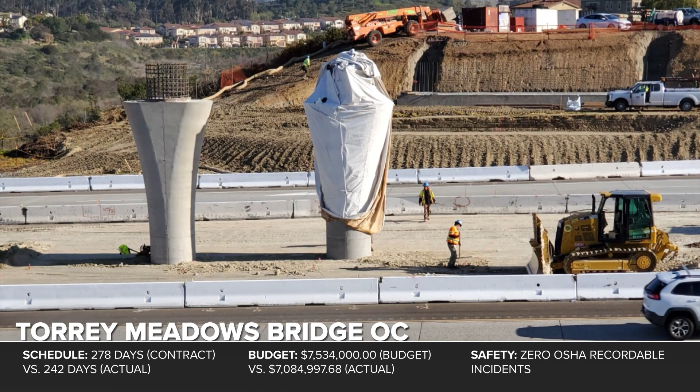The medal winners are: the Torrey Meadows Bridge OC project, led by Caltrans District 11 resident engineer Gennaro Janelle, Flatiron project manager Lenny Gardino, and Global Leadership Alliance facilitator Vicky Mattia Martin. When a new 2-lane bridge was to be built along State Route 56, Flatiron and Caltrans rose to the challenge of communicating and coordinating with the City of San Diego. The project team not only needed to meet Caltrans' design specifications, but had to conform to San Diego's White Book and Green Book specifications for public works projects.

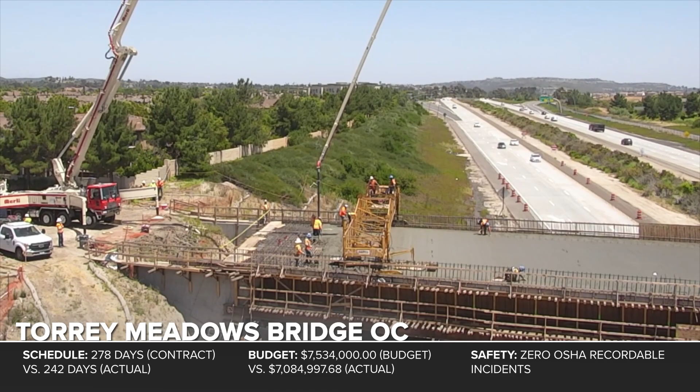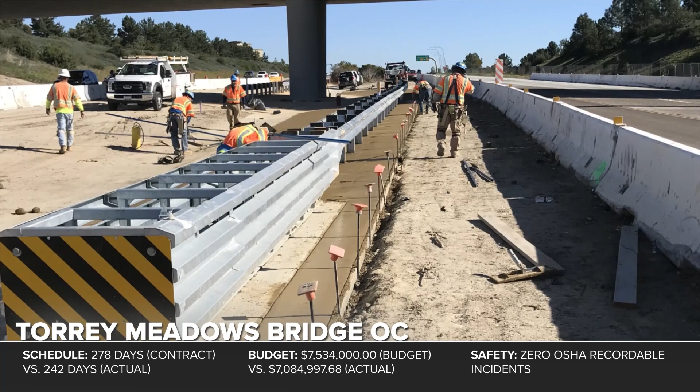The entire team took COVID-19 safety seriously. Everyone agreed to use face coverings before they were state mandated and practice social distancing on site, even during the bridge deck and hot mix asphalt pouring. Because the pandemic had dramatically decreased the number of vehicles on the road, the project team capitalized on the opportunity to increase the lane closure windows. Their decision accelerated construction, and they completed the bridge more than 1 month ahead of schedule.

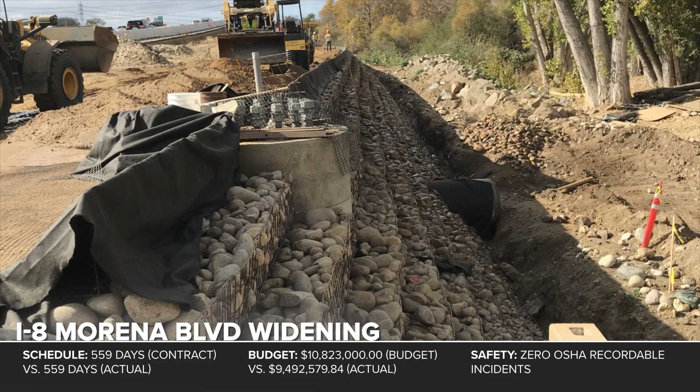The I-8 Morena Boulevard widening project was led by Caltrans District 11 resident engineer Brandon Farmer, Hazard Construction Company project manager Kirk Karras, and Advanced Management Systems International facilitator Bob Dorn. Exceptional teamwork was the order of the day throughout all phases of this widening of Interstate 8. The work of adding a lane and 2 through lanes to northbound Interstate 5 involved a geosynthetic reinforced earth wall, multiple cast-in drilled hole piles and overhead sign structures, a concrete barrier, hot mix asphalt, and precast concrete paving.

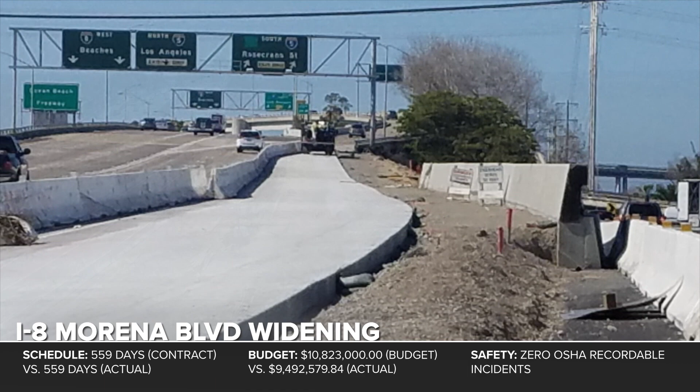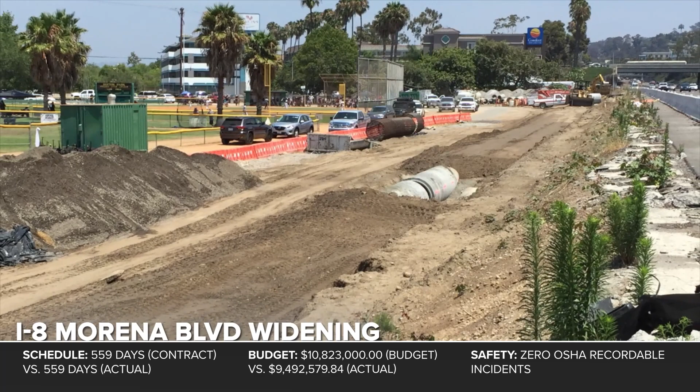Because of environmental constraints for the riverbed, Hazard needed to coordinate with the California Department of Fish and Wildlife, the City of San Diego, the Presidio Little League, various Caltrans teams, and several subcontractors. When the team discovered lead-contaminated soil and silting caused by an open channel, their partnering practices and collaboration paid off. Hazard's value engineering change proposal to replace the channel with a concrete pipe saved Caltrans more than $85,000 and reduced the hazardous soil generation by 30%.

Weekly partnering meetings made problem-solving much easier, even when responsibility for a construction detail was in dispute. Hazard and its supplier, with expertise from Caltrans, kept the project moving forward, ending it on time and under budget.

Congratulations to the teams and the projects under $10 million category for your bronze and silver awards. You truly have shown that partnering, even on smaller projects, pays off.

Next, we have the category for projects between $10 million and $50 million. Let's see who the winning project teams are. The medal winners are the SIDEHILL Viaduct Bridge Replacement and Dog Creek Bridge Retrofit Project, led by Caltrans District 2 resident engineer Nathan W. Alexander, Golden State Bridge Project Manager Paul Lukasiewicz, and OrgMetrics Facilitator Rob Ray.

The SIDEHILL Viaduct Bridge handles traffic heading south on Interstate 5 towards Lake Shasta and is located in the middle of the Union Pacific Railroad right-of-way and over a tunnel, while the Dog Creek Bridge site is in steep terrain that had to be accessed by abandoned roads.

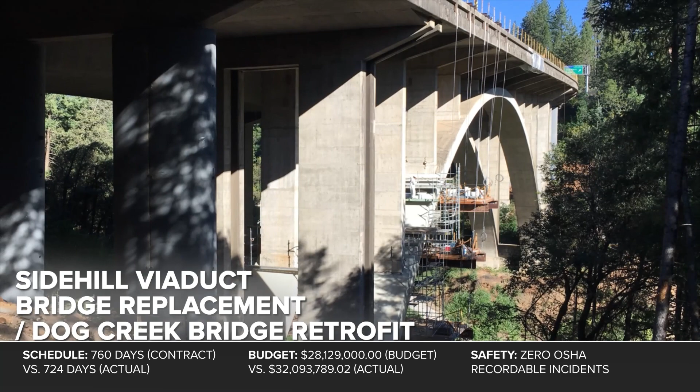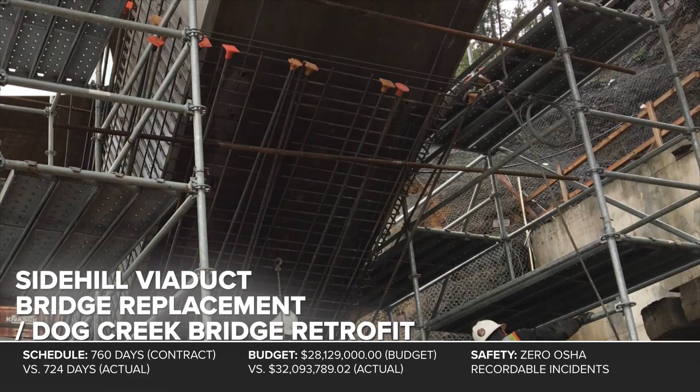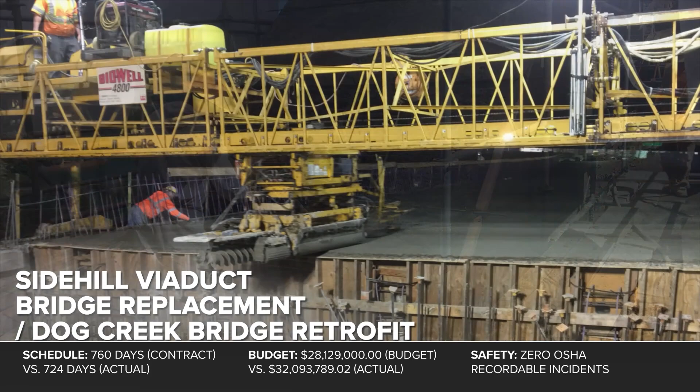But these issues were minor compared to the discovery of the arch's lateral deflection once the temporary falsework was removed. The team halted all work so Caltrans could evaluate the situation and come up with a retrofit strategy. Caltrans design changes included reinforcing the support members with carbon fiber and developing a lightweight concrete for the bridge superstructure. Golden State Bridge and Caltrans successfully coordinated the unplanned work with the Union Pacific Railroad, the U.S. Forest Service, and various regulatory agencies so that the rest of the planned work could proceed.

The SMARTSVILLE Roadway Realignment Project was led by Caltrans District 3 resident engineer Aaron Chamberlain, Flatiron Project Manager Charles Morrow, and Pinnacle Leadership Group Facilitator Kelly Bonine Hall.

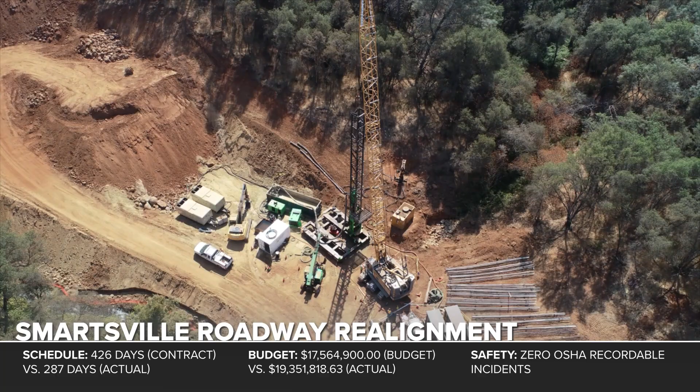Completing this super elevated bridge project in Yuba County's Gold Country, which updated geometric design to current standards, required 2.1 miles of new roadway to be constructed on a segment of State Route 20 with large cuts, fills, and a 305-foot structure. The project site was filled with hard rock, so the terrain was not ideal, and the project team needed to use controlled blasting to assist in the excavation of 130,000 cubic yards.

The bridge design called for precast girders approximately 150 feet long and required extreme engineering and ingenuity to construct. Through effective communication, Caltrans and Flatiron made it possible to complete construction with no incidents or delays.

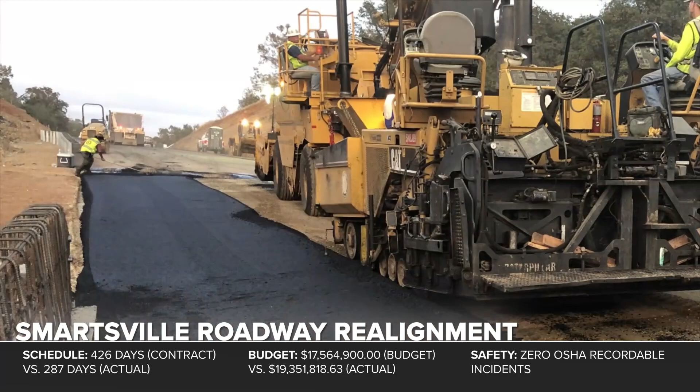Early on, Caltrans discovered a large earthwork error, and with the collaborative effort of the North Region Design Team, North Region Construction staff, and Flatiron staff, a 397-page change order was created and implemented that modified major portions of the roadway and addressed this issue. Flatiron adjusted its construction sequencing to accommodate these changes, and their effort minimized impacts to the project schedule and cost.

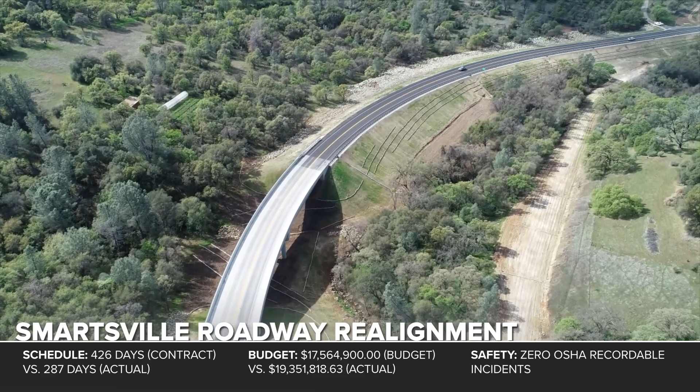The Highway 70 Widening Segment 1 project was led by Caltrans District 3 resident engineer Ryan Johnson, Teichert Construction Project Manager Danny Warren, and Global Leadership Alliance Facilitator Dina Blake.

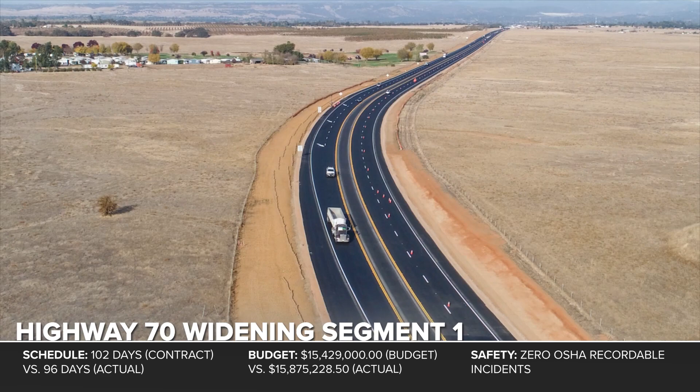This project was the first of 5 in a plan to widen Highway 70 from Oroville to Marysville for safety improvements. Highway 70 lacked a passing lane, and District 3 was determined to address the higher-than-average accident rates and improve safety before the end of the 2019 construction season. The project team fully committed to these goals.

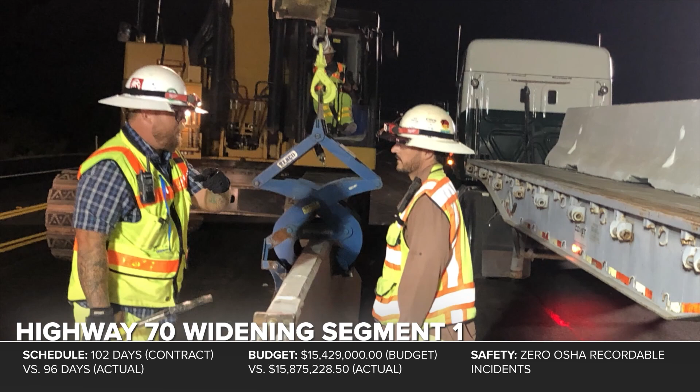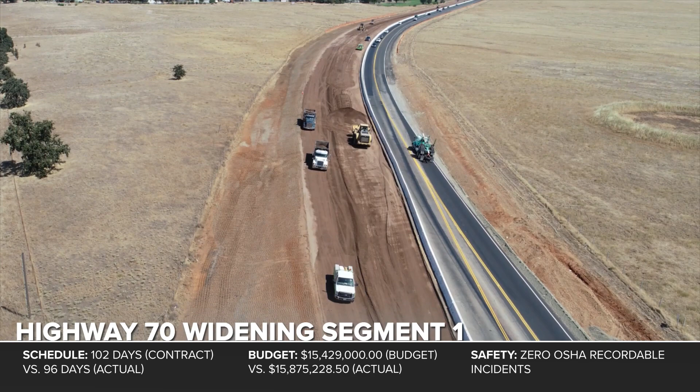Caltrans and Teichert Construction needed to complete 100,000 cubic yards of roadway excavation and import borrow in just 20 working days, a feat that required large amounts of compaction testing. So the Teichert Construction personnel and the Caltrans testing staff collaborated to ensure both quality control and quality assurance testing were performed efficiently and safely.

The Interstate 680 ramp metering project was led by Caltrans District 4 resident engineer Hung No, Bay Cities Paving and Grading Incorporated project manager Dave Knott, and ATI Systems facilitator Craig Erickson.

On this project in Alameda County, the Caltrans and Bay Cities Paving and Grading team installed metering at 4 on-ramps, added a high-occupancy vehicle lane to northbound I-680, constructed 2 retaining walls, and installed 6 closed-circuit TV cameras, 2 changeable message signs, 18 traffic monitoring stations, and 6 maintenance vehicle pullouts.

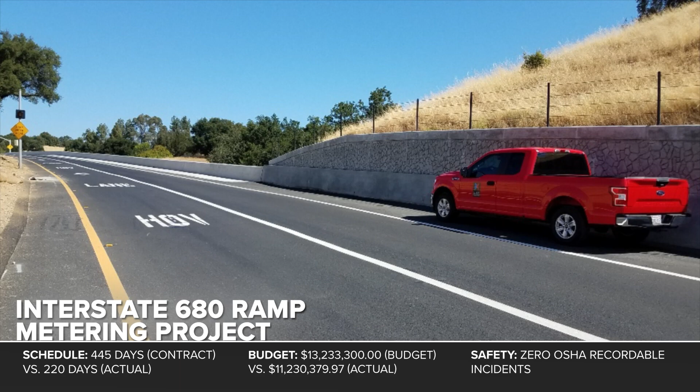When electrical work for the ramp metering was found to overlap with other Caltrans projects on the corridor, Bay Cities initiated constant contact with the other projects in the area for the team to coordinate and sequence the project's electrical components, thereby avoiding costly delays and throwaway work.

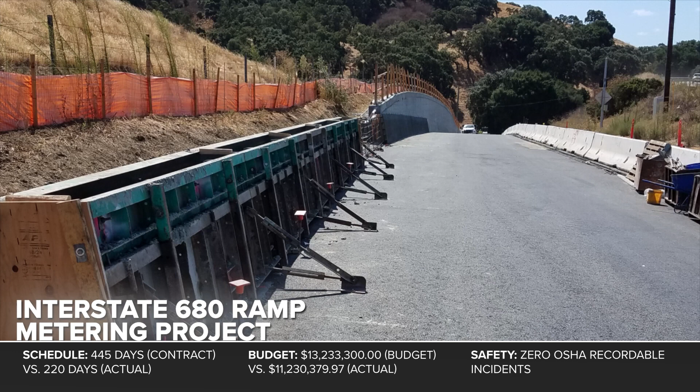And when conflicts were found with the new concrete median barrier and existing underground drainage and electrical systems, the entire project team scheduled field meetings to collaborate on designing a concrete barrier that both resolved the conflicts and avoided the project's temporary lighting. In the end, the team not only completed the project well ahead of schedule, but shaved more than $2 million off the total cost.

The I-880 and SR-84 ramp improvements project was led by Caltrans District 4 resident engineer Vernon Nguyen, Ghilotti Construction Company project manager Gia Chen, and Global Leadership Alliance facilitator Holly Parrish-Besner.

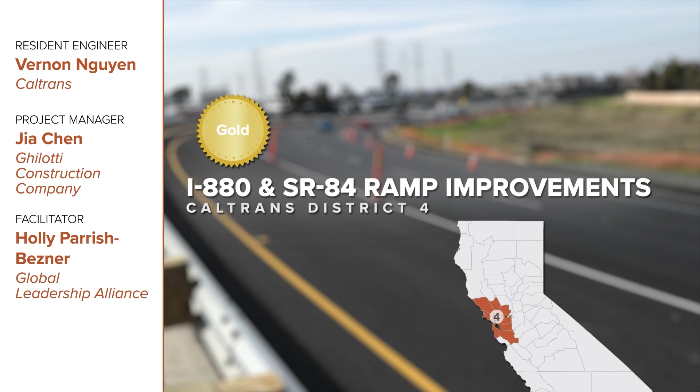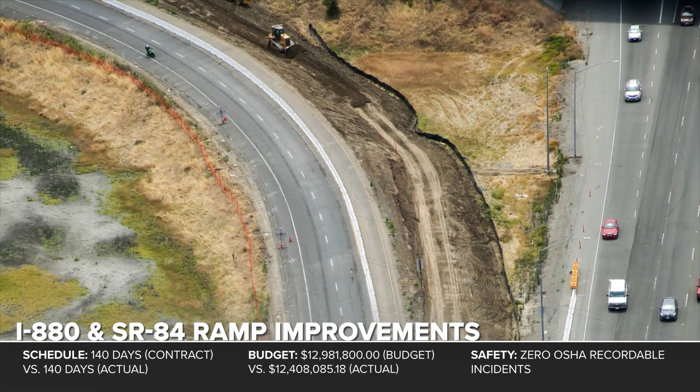This project near Fremont and Newark in Alameda County required a Herculean effort. At the very start, the project team faced a situation that could have negatively impacted the cost and schedule. There were fiber optic and other underground utilities owned by the Bay Area Infrastructure Financing Authority that were not shown in the contract plans at bid time.

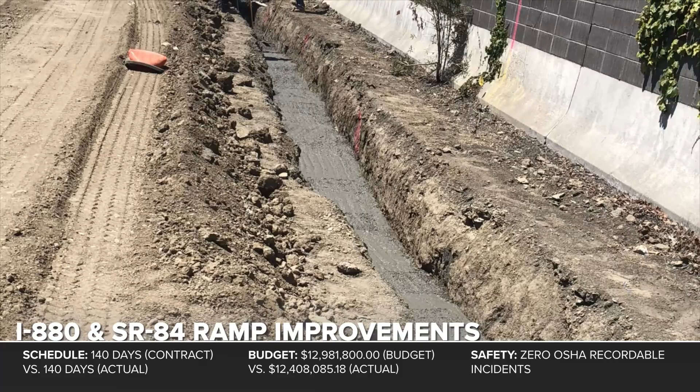The project team held a number of meetings with all of the local stakeholders and ultimately reached an agreement on a plan to expose and cap the fiber optic lines. Caltrans expedited the design as well as buy-off from the financing authority, while GCC worked on gathering the materials and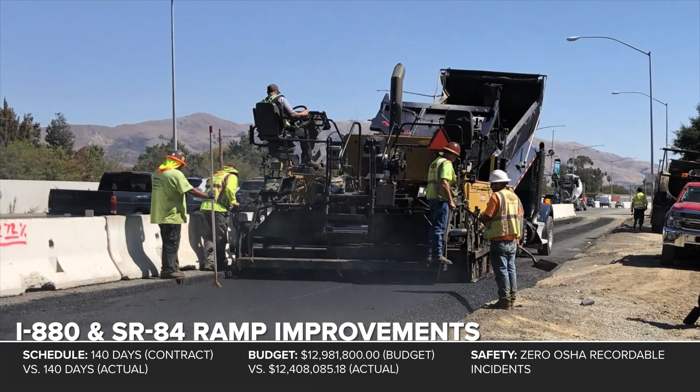resources to execute the work quickly. This same issue put the hot mix asphalt paving schedule at risk, so the team brainstormed ways to get the paving done before the winter season. Caltrans coordinated with the district office to change ramp closures for daytime and weekends, while GCC arranged for its paving

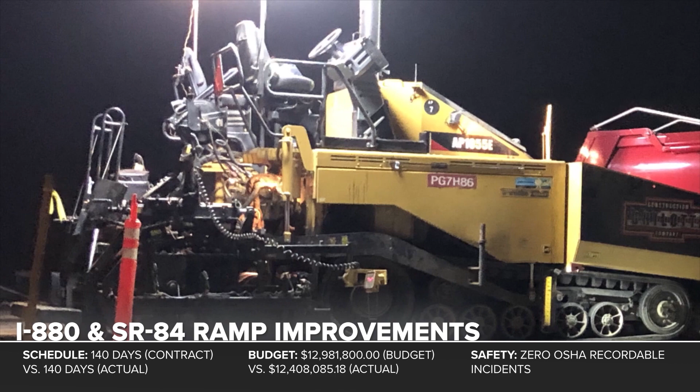crews to work overtime and weekends. Strong partnering brought the project in under budget, and the team achieved one of its main goals: 0 claims.

The Route 198 Pavement Rehabilitation Project was led by Caltrans District 6 resident engineer Javier Huerta, Lee's Paving Incorporated project manager Russell Carell, and ATI Systems facilitators Craig and Dennis Erickson.

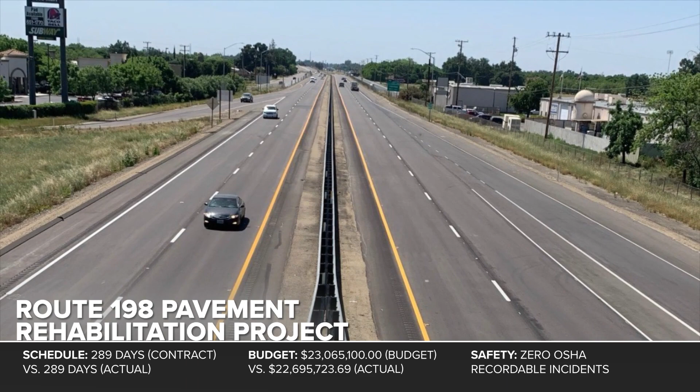When a supply issue cropped up with the pavement overlay on an 8-mile stretch of Highway 198 in Tulare County, the team decided to replace the rubberized hot mix asphalt pavement overlay with Type A HMA. And to improve efficiency and reduce the number of days with lane closures, they piloted varying closure lengths outside of the peak traffic periods. Their efforts succeeded, as the project was not only completed on time but under budget.

And to comply with the COVID-19 shelter-in-place order, the team became one of the first Caltrans project teams to use WebEx for a virtual closeout partnering session.

Partnering was especially critical for this pavement project because Lee McClatchy, president of Lee's Paving, who was also the team's project manager, suffered health issues and tragically passed away during the course of the project. But Lee's commitment to partnering was evident.

When Russell Carell became the company's president as well as the project's PM, the team recommitted themselves to the partnering principles Lee established in the initial partnering charter. The team smoothly transitioned with a new plan of attack to complete the project in Lee's honor.

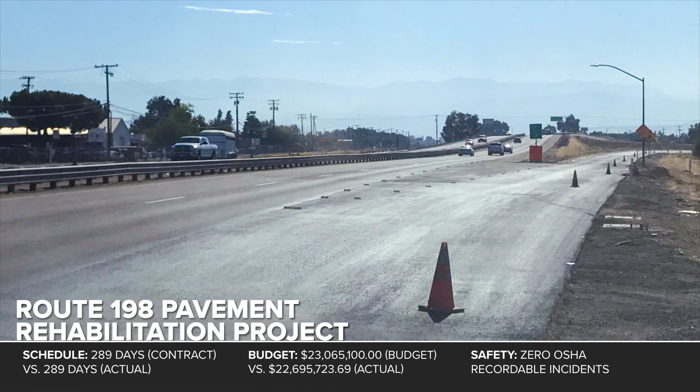The State Route 190 LAIRDS Rehab project was led by Caltrans District 6 resident engineer Javier Huerta, YARB's Grading and Paving Incorporated project manager Troy Yarborough, and Creative Alliance Group facilitator Leonard Steinberg.

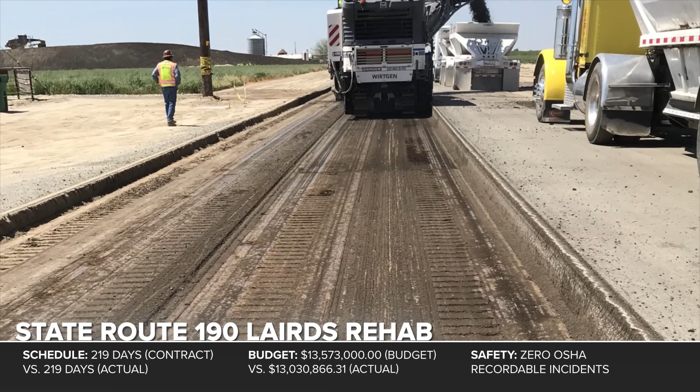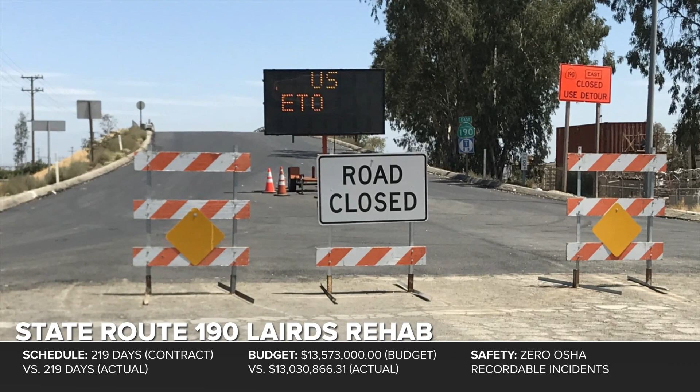This pavement reconstruction and widening project along State Route 190 would not have succeeded if the team had not fully engaged with the County of Tulare and the public. Among the early obstacles were the public utilities lining the Caltrans right-of-way and conflicts with another Tulare County project. To avoid delays from these two obstacles, the team coordinated with all stakeholders to modify the project staging.

They developed a change order that allowed YARB's Grading and Paving to work on the eastern 4 miles of the project under a full closure, with a detour using Tulare County roads, while Tulare County simultaneously reconstructed part of its roadway under a full closure, using the western portion of State Route 190 as a detour.

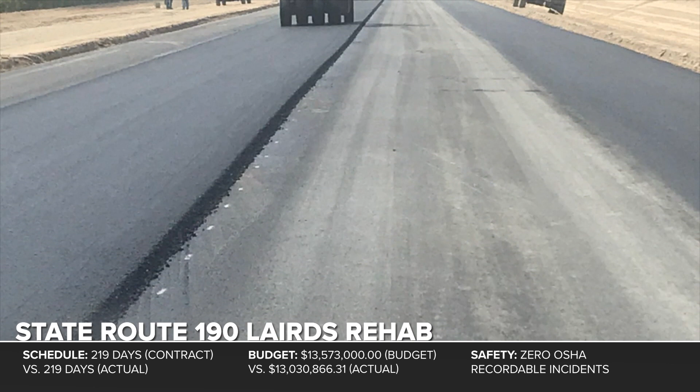The State Route 52 slabs replacement project was led by Caltrans District 11 resident engineer Gennaro Janelle, Hazard Construction Company project manager Kirk Karras, and GreenCom Incorporated facilitator Dennis Green.

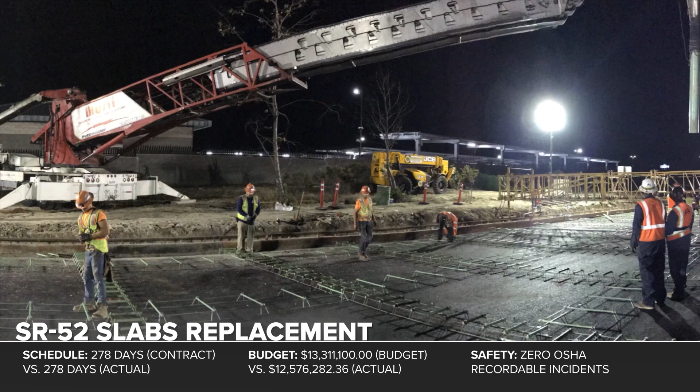In the kickoff workshop for this slab replacement project on State Route 52 just south of Miramar Air Base, Caltrans and Hazard Construction agreed on a change order to reduce the 10 night shift closures down to 2 55-hour weekend closures. The reduced number of closures significantly lessened the project's impact on the public and the exposure of workers to

traffic risks. The project team's partnering process to address incidents with impaired or distracted drivers was an essential part of the team's safety strategy to achieve 0 job site injuries.

Hazard and Caltrans held a joint safety stand-down to identify and reduce the risks to motorists in the project area. The team developed new lane closure charts and brainstormed ideas to improve the safety environment for everyone, workers and motorists. At the end of the day, they were able to complete the project safely, on time, and under budget.

The State Route 52 Restore Pavement Profile project was led by Caltrans District 11 resident engineer Carlos Lopez and S&B Engineering Incorporated project manager Josh Bridwell.

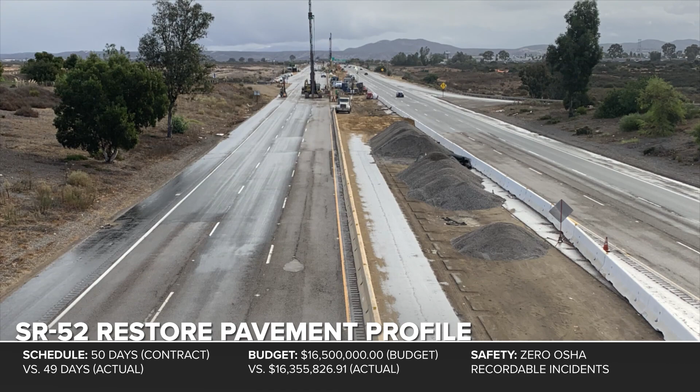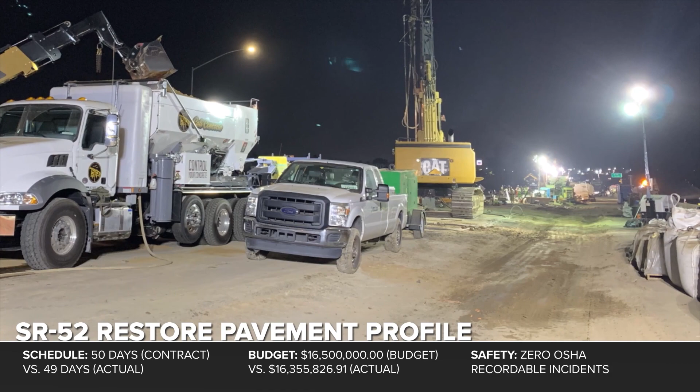When State Route 52 was built, constructing a highway over a landfill was a unique idea, but in this case, one with an unexpected outcome. Due to settlement in some areas, the highway, which runs between the San Diego suburb cities of Santee and La Jolla, was dubbed the roller coaster route. Motorists noted that it was bumpy, unsafe, and damaging to vehicles.

Tasked with stabilizing the subsurface to mitigate the roller coaster effect, S&B Engineering applied 3D modeling for the grinding and AC paving phases to correct the profile and achieve the necessary smoothness.

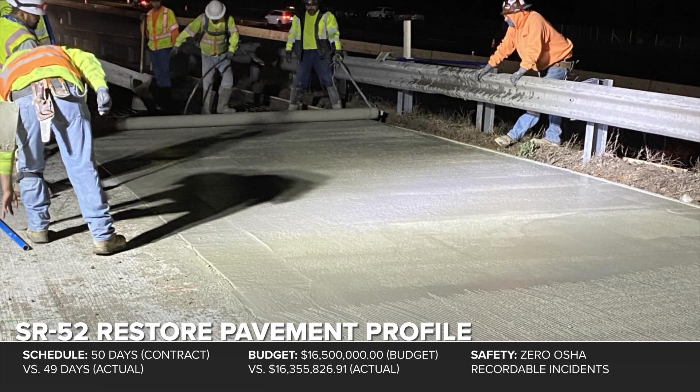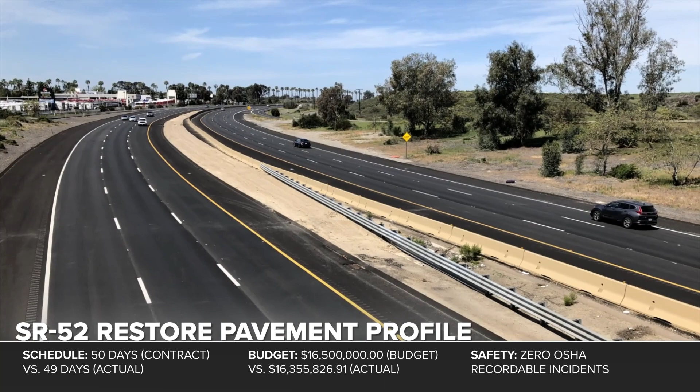Congratulations to the teams in the $10 to $50 million category on your gold, silver, and bronze partnering awards. Now let's find out who the best-in-class award winner is for this category.

And the winner is the Interstate 880 and State Route 84 Ramp Improvement Project. Congratulations. And here with a special message for the team is the District 4 Director, Dina El-Tawansi.

Hello, I'm Dina El-Tawansi, Caltrans Director in the Bay Area. I would like to congratulate the team that worked on the I-880 and State Route 84 ramp improvements in Fremont and Newark.

Complex projects like these improvements require a real focus and collaboration between everyone that's involved to be successful. An unparalleled effort of communication and collaboration is being celebrated today that led to our success at handling challenges that could have caused great schedule and cost impacts to the project.

Special thanks are in order for the Caltrans team, the Jolari construction team, staff at the Global Leadership Alliance, and the San Francisco Public Utility Commission and the Bay Area Infrastructure Authority for the close coordination and attention to the details that it took to make this transportation improvement a reality.

On this $62 million reconstruction of 21 lane miles of southbound Interstate 5 near Mount Shasta, all the work took place on a section of interstate highway subject to harsh winter conditions and heavy truck traffic.

So how did the project team manage to shorten the schedule to complete this project in 2 seasons instead of 3, and save more than $3 million?

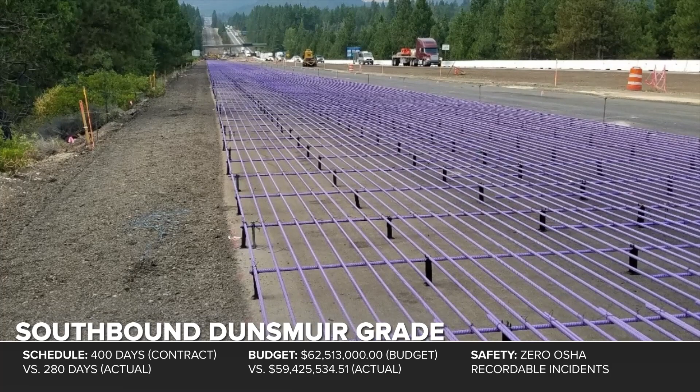J.F. Shea Construction and Caltrans collaborated on a value engineering change proposal that would make stage construction changes to allow the team to finish the project well ahead of schedule.

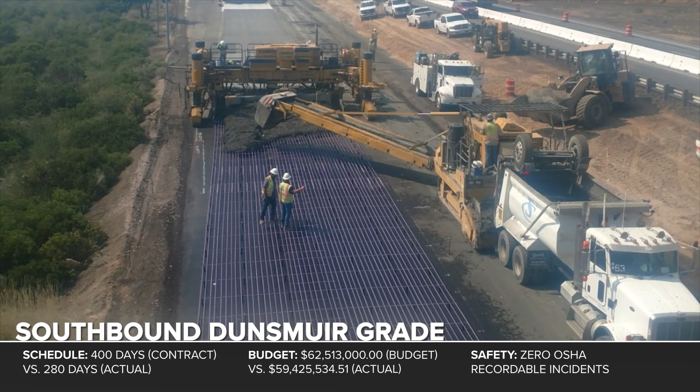In the process of developing these restaging plans, the team identified ramps would need to be temporarily constructed for trucks to access the nearby California Highway Patrol inspection facility.

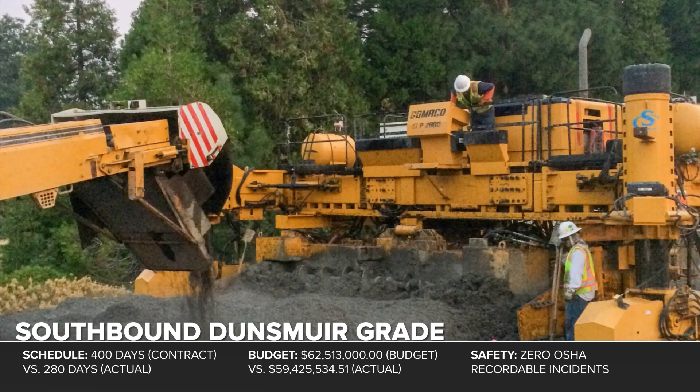While partnering through these logistics, it was determined that since another project was being constructed within the Scales facility, the CHP was willing to accept a long-term closure of the Scales to allow work on Interstate 5 to proceed without the need for temporary ramps.

Working long hours and multiple shifts, the team managed to complete half the work in under 6 months.

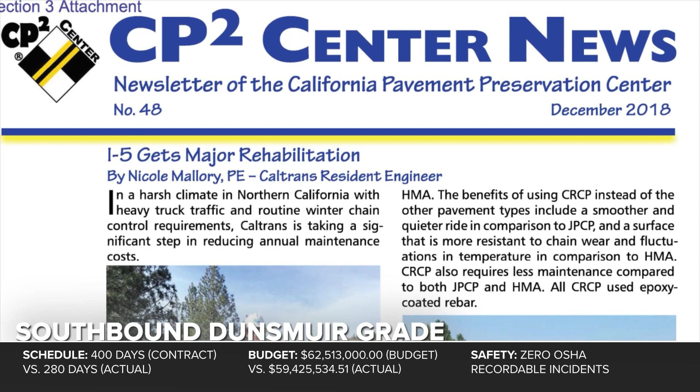Local newspapers covered the partnering between Caltrans, J.F. Shea, and the California Highway Patrol numerous times, and the project itself was recognized by the California Pavement Preservation Center at Cal State Chico for its long-life pavement design.

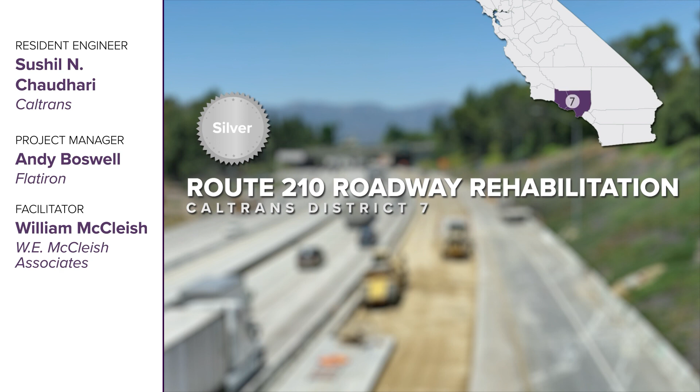The Route 210 Roadway Rehabilitation Project was led by Caltrans District 7 resident engineer Sushil N. Chaudhari, Flatiron Project Manager Andy Boswell, and W.E. McCleish Associates Facilitator William McCleish.

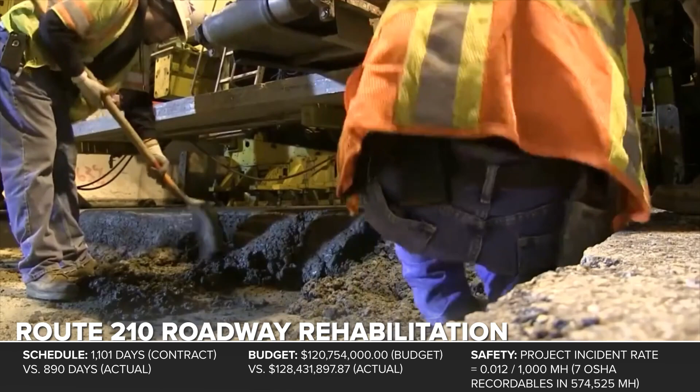On this $128 million project through La Cañada Flintridge, Glendale, and Pasadena, the project team replaced nearly 400,000 square yards of pavement and bridge approach slabs at 16 locations along 10 miles of the 210 freeway. Flatiron used 11 types of pavement, some experimental, including precast jointed plain concrete, two-lift composite pavement, continuously reinforced concrete pavement, and jointed plain concrete pavement.

The 4-year project was one of the largest precast slab concrete projects in North America, and yet the team successfully minimized traffic impacts that such a job could incur. 6,500 precast concrete pavement panels were installed at night, with the freeway reopening each day to full traffic by 5 a.m.

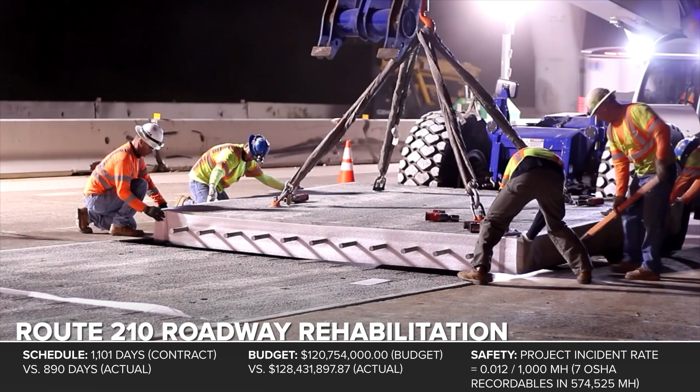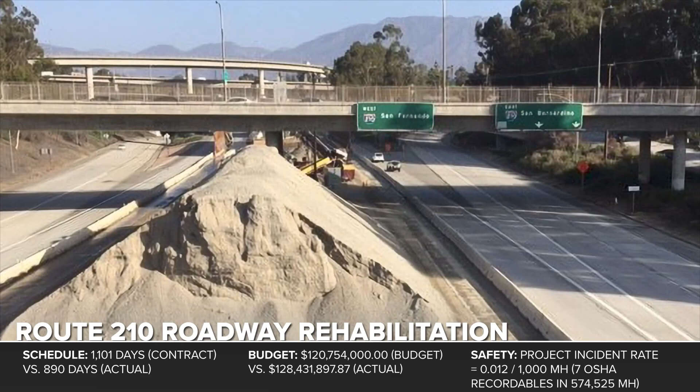They also partnered with the Tournament of Roses parade officials on 3 events to avoid impacts on the yearly festivities. With the blessing of the city of Pasadena, a batch plant and a crushing facility were set up near downtown to recycle the existing concrete pavement. Over 100,000 tons were reused, which eliminated hauling through city streets to the landfill and helped the team complete the project close to 7 months ahead of schedule.

The I-5 Pavement Rehabilitation Project in Santa Clarita, California, was led by Caltrans District 7 resident engineer Daniel Wijaja, Guy F. Atkinson Construction Project Manager Scott Mathewson, and OrgMetrics LLC Facilitator Cinda Bond.

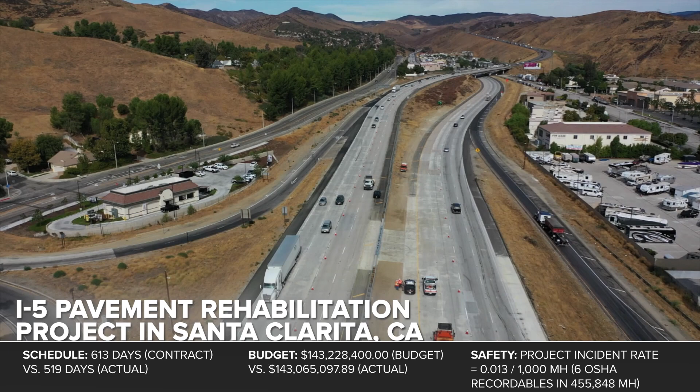This 2-year, $143 million project rehabilitated a more than 50-year-old section of Interstate 5 in Santa Clarita that carries more than 1 million vehicles a week. The project team was tasked with removing and replacing nearly 16 miles of existing pavement using a combination of precast panels and individual slabs of rapid-strength concrete.

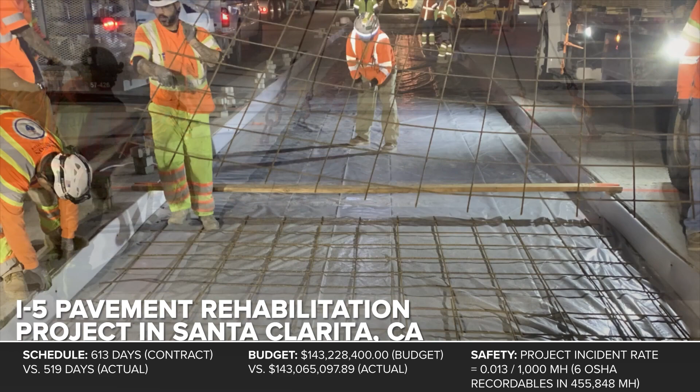The existing removed concrete and asphalt materials were crushed on-site into a base material and reused. Local landowners accepted the surplus excavated materials, and these relationships further helped the project stay on schedule and within budget.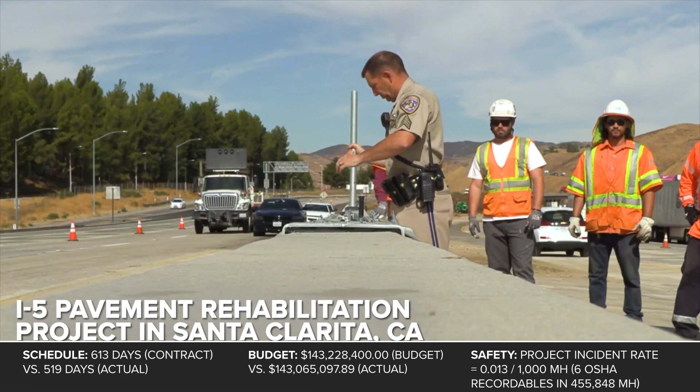Partnering was evident to stakeholders and motorists alike when Caltrans and Atkinson collaborated with the California Highway Patrol, City of Santa Clarita, and the County of Los Angeles to construct an innovative emergency turnaround dubbed Operation Snowflake. The new gate installation now makes it possible for motorists to follow a guided turnaround within the median of the I-5, avoiding what was once a 26-mile round trip during severe winter full freeway closures.

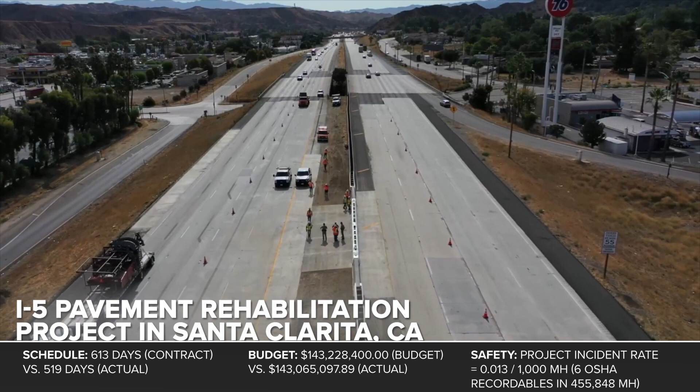The Victorville I-15 widening project was led by Caltrans District 8 resident engineer Tagreed Al-Khatib, Ames Construction Project Manager Rob Manning, and Paradigm Consulting Facilitator John Swartzentruber.

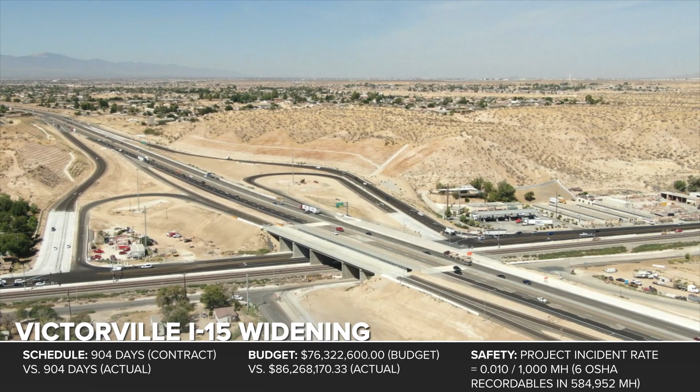This $86 million project on Interstate 15 in Victorville, one of the busiest corridors in the United States, spanned the Mojave River, historic Route 66, and a BNSF freight rail double track. Caltrans and Ames Construction widened the highway's main line and 3 bridges, constructed 2 mainline bridges, reconstructed 3 interchanges, and installed landscaping.

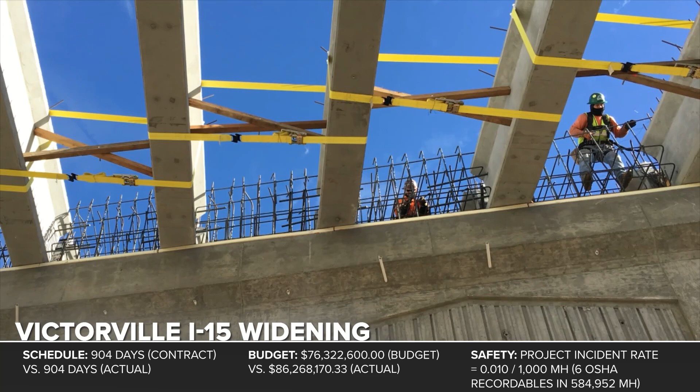Beset with delays from the start and an unusually wet winter that impacted construction work in the river, the project began a year later than planned. Also, the existing shoulder grades did not match the design grades, so Caltrans had to conduct a survey before the design team could correct the plans.

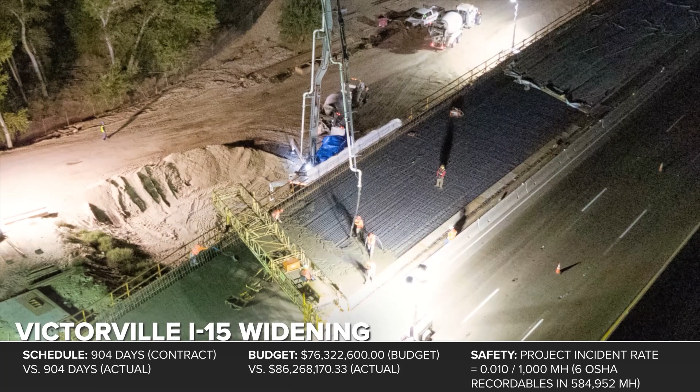When the pavement could not be constructed in the specified closure windows, the team brainstormed solutions, and Caltrans approved a 66-hour closure window. In a first for District 8, the cold plane subcontractor used LiDAR technology to determine where to grind to achieve a smoother ride and consistent cross slopes for drainage. Despite all the challenges and initial delays, the team completed the 904-day project right on time.

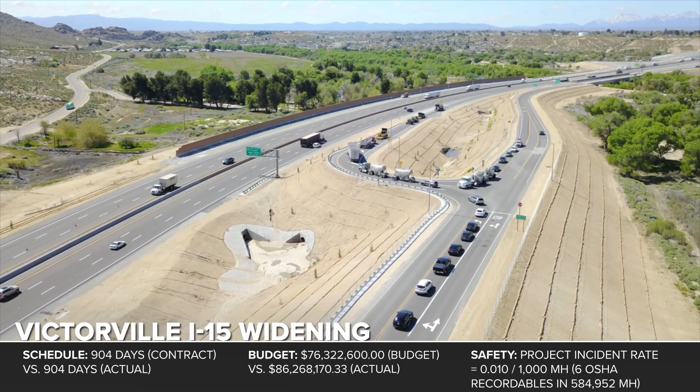The Construct CRCP Overlay, HMA Type A, and Lighting Project was led by Caltrans District 11 resident engineer Daniel Hernandez Duarte, Security Paving Company Incorporated project manager Basil Jamaluddin, and Global Leadership Alliance facilitator Holly Parrish-Besner.

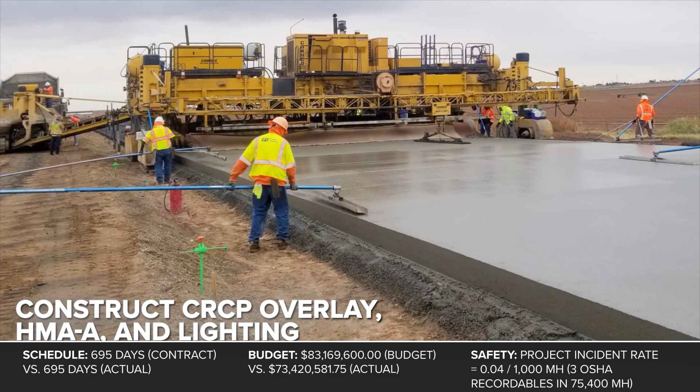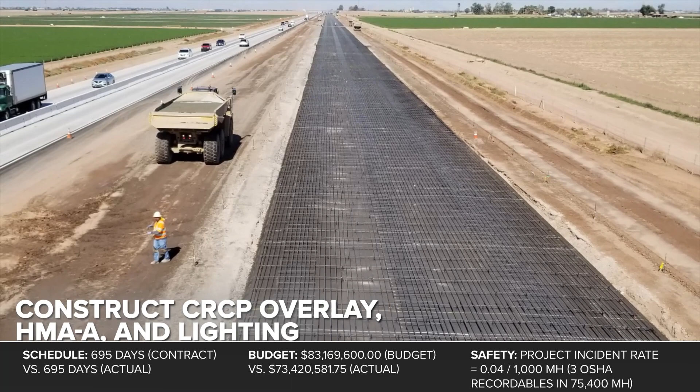This $83 million project in the Imperial Valley came in $10 million under budget, despite extreme summer heat, high winds, and a 4-month delay. How did the project team do it? The goal was to reconstruct 15.1 miles of Interstate 8 with continuously reinforced concrete pavement in 695 days.

The team jointly decided to sequence the work more effectively by shuffling stages 4 and 5 in an effort to be more efficient and improve overall project quality and delivery.

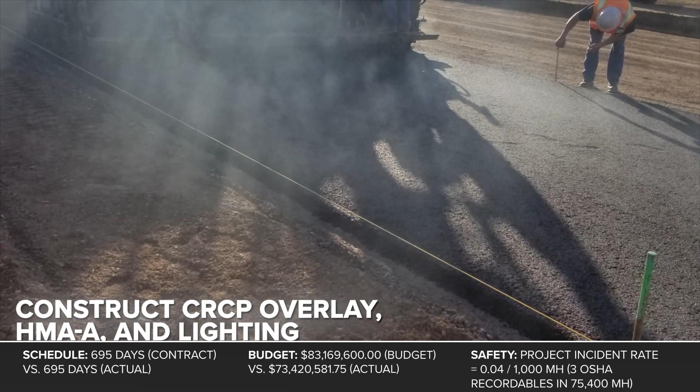Caltrans and Security Paving also collaborated on finding a cost-effective way to reduce the continuously reinforced concrete waste and improve the freeway's surface smoothness. The team installed and used a string line as a reference system to control the grade in preparation for concrete paving. This resulted in a consistent, continuously reinforced concrete depth, which reduced waste and improved smoothness.

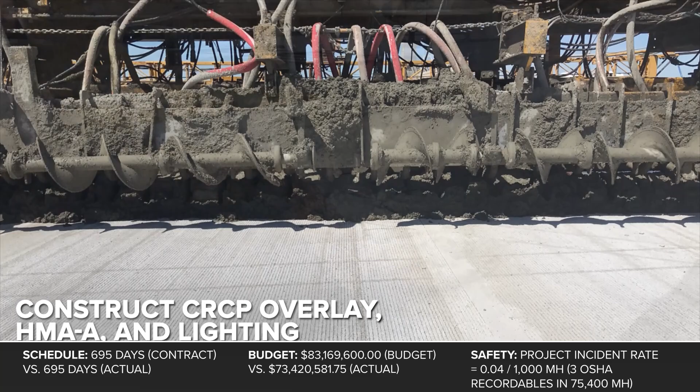By agreeing to use a 6-week look-ahead tool, the team was able to allocate their resources strategically in the short term and minimized roadblocks.

Congratulations to all the gold, silver, and bronze award-winning teams in the project greater than $50 million category. Our final award today is the best in class for this category. And the winner is the Interstate 5 Pavement Rehabilitation Project in Santa Clarita, California.

Congratulations to the team. And to help recognize the team, please welcome District Director Tony Tavares from District 7 with a personal message. Hello, I'm Tony Tavares, the Caltrans Director for Caltrans District 7 in Los Angeles and Ventura counties. I'm honored to accept the Best in Class Award for the I-5 Pavement Rehabilitation Project in Santa Clarita on behalf of our entire District 7 team.

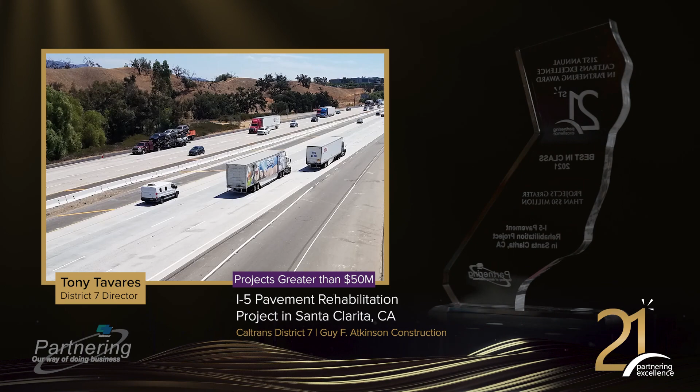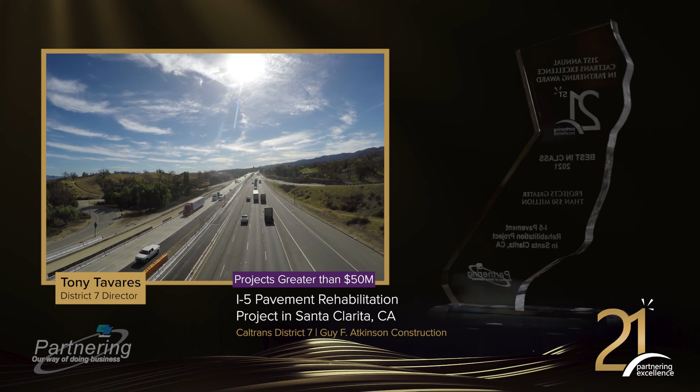Our partnering champions that led the project partnering effort include Caltrans resident engineer Daniel Wajaja, our contractor project manager Scott Mathewson, our contractor Guy F. Atkinson Incorporated, our partnering facilitator Cinda Bond with OrgMetrics, and our partners at the California Highway Patrol. Thank you. This award acknowledges their dedicated efforts to complete the project, working together as a partnering team, and they all represent the highest levels and best practices of partnering.

Working efficiently and together, these partnering teams were able to deliver the project ahead of schedule by almost 94 working days, come in under budget by more than $160,000, and they saved almost $220 for every dollar spent on partnering. I'm proud to be part of the District 7 team with all of you. Congratulations on your exceptional partnering success.

Thank you, Tony, and congratulations to the project team for your Best in Class award. It's been an absolute pleasure for me to spend time with you this afternoon as we presented the 2021 Caltrans Excellence in Partnering Awards. In the completion of these projects, you truly have embodied the ideas, the values, and the importance of partnering, and it's shown in the success of each and every one of your project teams.

I say thank you to those winning teams, as well as all the other project teams out there who embrace the fundamentals of partnering, and for your continued effort to deliver quality construction projects day in and day out. You truly take to heart the principles of partnering and made it your way of doing business. Thank you for your efforts, and thank you for joining us at the 21st Annual Caltrans Excellence in Partnering Awards ceremony. Have a great evening.